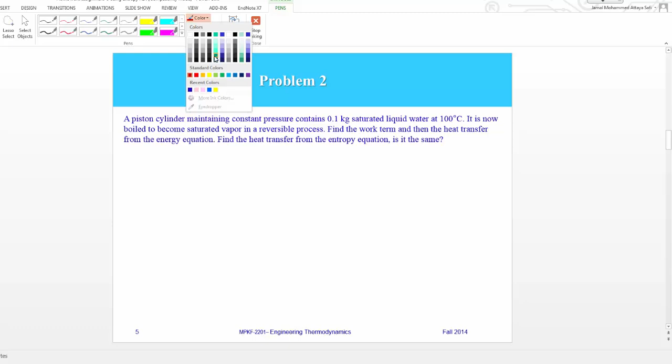Okay. Problem number two. I can choose probably this color just to draw it. The problem is saying that we have a sort of piston cylinder arrangement like this. And it tells me that I have 100 gram saturated liquid. So I'll write saturated liquid, basically water,

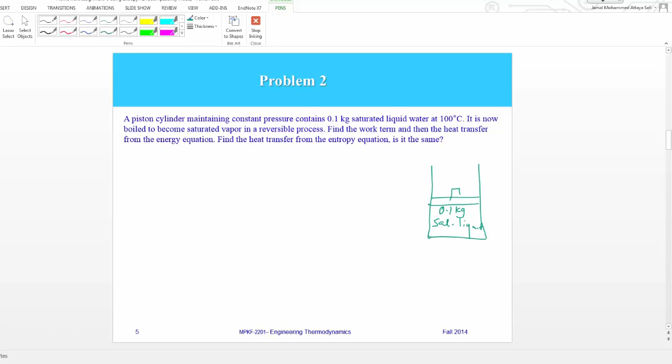at T1 is 100. So at 100 centigrade. And it is now boiled. So now we start heating. So let's say that heat is added here. You start actually heating the assembly, and until all the saturated vapor, sorry, until all the saturated liquid becomes saturated vapor.

In a reversible process, very important also in the reversible process because it also gives you a piece of information, and then it asks you to find the work and find the heat transfer from the energy equation, and also we ask you to find the heat transfer from the entropy equation, because now we can find Q using the entropy. That is the input from chapter 7, which is using the entropy analysis. You're going to see it's going to make it a little bit easier.

So before we draw, I will first define my system. I say this is my system, so the water inside is my system. And then of course we have some assumptions here, and the most important one is that we have a closed system here, so the mass is constant.

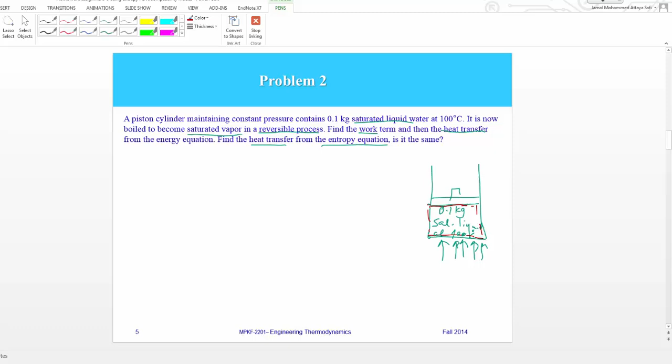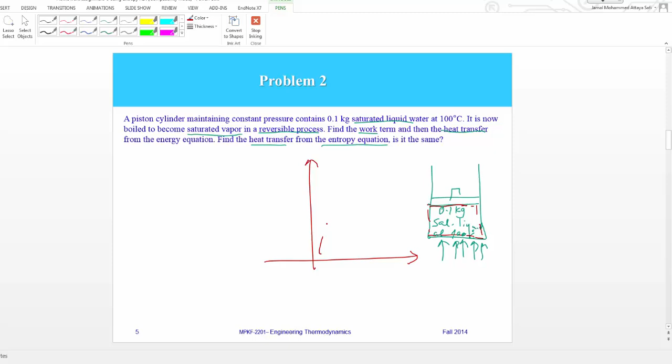Then we can draw the PV diagram or TV diagram in this case, because the temperature is given. The problem is saying that I have saturated water, which is at this line. So this is point 1. And it tells me I start boiling. This is also a very straightforward problem. I start boiling this until all the water becomes vapor. So this is a vapor.

And this happens if this is TV. So this is happening at 100 centigrade. And remember that the constant pressure lines are always like this. And you can see that it's a constant pressure process. We start at the start of the saturation dome, and end at the saturated vapor line. The problem is asking that we first use the energy equation, the one that we use in chapter 4, closed system, to calculate Q, which is the heat addition, and also it asks us to use entropy this time to calculate Q and compare between them to see if they are the same, basically.

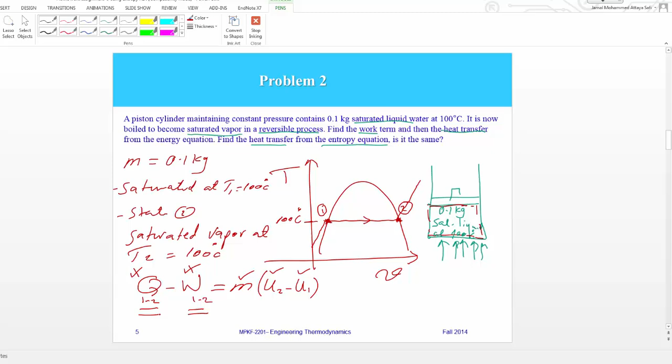U1 and U2 we actually can read or find, because state 1 is fully defined and state 2 is fully defined. So the challenge now is that either you need to calculate the work so you can calculate Q, or you can calculate Q so you can calculate the work. So let's try to calculate the work.

So what is the work? We know that for a closed system, it's an expansion work, a boundary work, and the boundary work from 1 to 2 is the integral of PdV from 1 to 2. Since the pressure is constant here, it's P times (V2 minus V1). I will just draw it here: this is a T-V diagram, and if this is 100 centigrade, this is V1, and this is V2. Very straightforward.

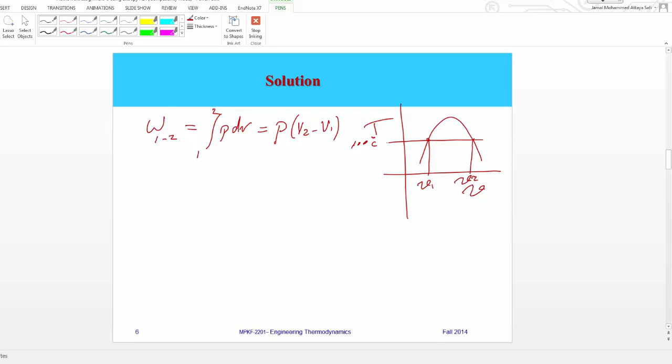So I can see that V1 is actually Vf at T1 of 100. I just go to the table at 100 centigrade and read Vf there, because as you can see, that is Vf and that is Vg. And V2 is actually Vg, gas, at 100 centigrade. I can also write here immediately, because we're going to need it, U1 is Uf at 100 and U2 is Ug at 100 centigrade. This is state 1 and this is state 2.

So if you substitute, you can immediately see that this is pressure multiplied by Vfg. And you know what this means? It means Vg minus Vf. And if you write this down, of course, please don't forget the mass. I sometimes forget the mass. You need to multiply by the mass to get the total work, the capital letter W. And the pressure in kilopascal, where did I get this number from? This is P, a constant. It's the saturation pressure at 100 centigrade. You can also read it in the table at 100 centigrade.

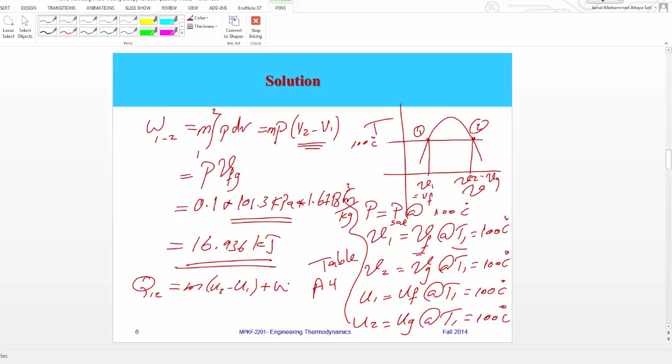Now, if you have the work, it wouldn't be difficult to calculate Q, because Q1 to 2 is actually m times (U2 minus U1) plus the work from 1 to 2, right? And the work we already calculated, and this we have, and this we have, so we can calculate Q. So Q1 to 2 is equal to m Ufg. I write it as Ufg because U2 is Ug and U1 is Uf. You can also read it immediately in some tables. Plus the work from 1 to 2.

And substitute the things that we know to calculate Q. Then Q1 to 2 is equal to 0.1, which is the mass, multiplied by Ufg, plus the work which we calculated, and that's going to give you 225.7 kilojoule, and that is the heat transfer.

Now you can also see how many ways you can calculate Q. I can also say Q1 to 2 is the mass multiplied by the difference in enthalpy, so mass times hfg. That's also another way of calculating. You have also learned it before, and that's going to give you 0.1 multiplied by 2257.03, and that's going to give you 225.7, exactly the same number as here. It's very interesting. It's very clear now. You see how we can calculate Q.

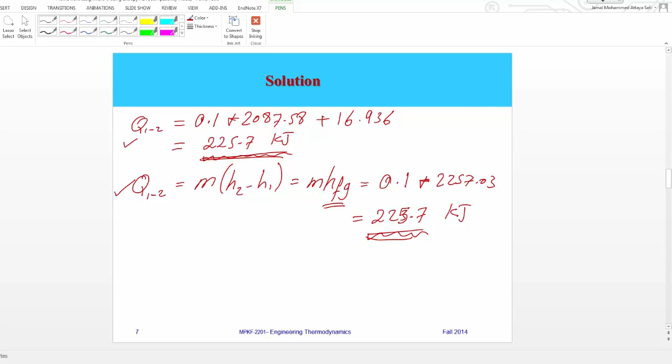So Q, either we calculate it by first calculating the work and then adding the work to the mass multiplied by the difference in internal energy. This is the second method that you can calculate Q, and that is Q equal to the mass multiplied by the difference in enthalpy. And you can see that it gives you the same number. And the third is using the entropy equation, as we can see. And I can write it here. I can see the entropy equation.

And you know it. We said that m(S2 minus S1), this is from chapter 7, is equal to the integration of dq divided by T plus the S generation, or the entropy generation. Now remember that this is the general form of the entropy equation, which is the mass multiplied by the change in entropy. The mass multiplied by the change in entropy is equal to the integration of dq divided by the temperature plus the generation, or the entropy that has been generated by doing this process.

Now, be very careful, if I have a reversible process, and that's very important because in the problem it said that it was a reversible process. If you have a reversible process, we said that the equality sign prevails and there's no generation, so that will be 0. If you have a reversible process, there's no generation, increase or decrease of the entropy, and that gives you this as 0, which means that

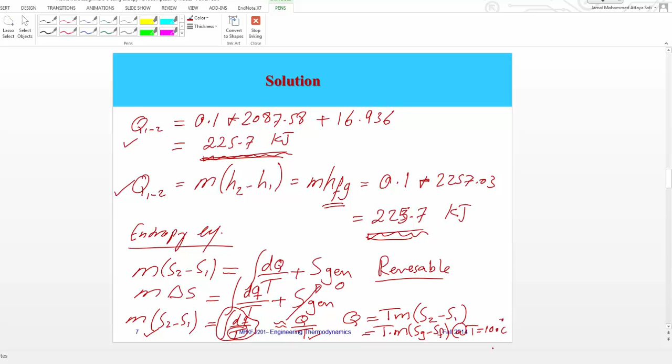You get this from the tables, and then I can write down here the final answer, I'll do it in different colors. So this is where we have the final answer, and if you put in the numbers, if you get this one and this one from the tables, and this is 100, you will find that Q1 to 2 is equal to, I need just to find the numbers, and that's 0.1 multiplied by 373.15 multiplied by 6.048. This is Sfg, you read it from the table. Please notice that this has to be in Kelvin. Very important, the temperature here has to be in Kelvin, so you have to convert it to Kelvin.

We have 100 temperature plus 273, and that's going to give you 373.15. And if you do so, that's going to give you 225.68 kilojoule. And as you can see, it's actually this number and this number. It's not a big difference, a very small error in the two numbers. So you can actually use any one.

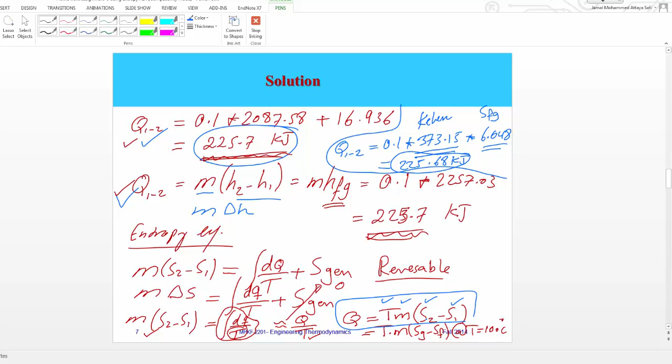Either you do this, so you calculate the work first, and then you add it to the mass multiplied by the difference in internal energy, or you can use this. This is the second way to calculate Q, which is actually the mass multiplied by dh, or you can use the entropy, and that's, as you can see here, this is the equation. So the three ways here are valid to calculate the heat added, or the heat needed.

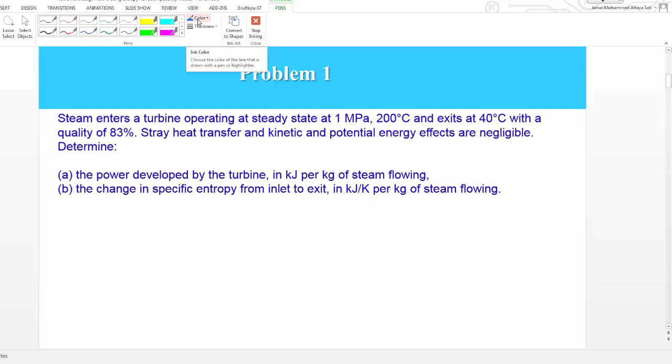Okay, we start with homework assignment 6 using entropy. That is problem number 1. Now, problem number 1 is saying that we have a turbine, so let's draw our turbine.

And that turbine, of course, the function of a turbine is to give me power out, or to give me rotation, which we call mechanical work, and that can be converted into electrical work. And to do so, we have, of course, the steam coming in at the inlet, so I will call this 1, and exiting at the outlet, and I will call it number 2.

And when the steam comes in, it comes with high enthalpy, and then inside the turbine, we suck some of this enthalpy or this energy and convert it to work, and the rest, of course, goes with the working fluid out at the exit. Now it's a steam turbine, and it is quite an easy problem in terms of that both inlet and outlet states are actually defined.

So I can write here P1 is 1 megapascal, so that is given, and T1 is 200 centigrade. And we know now, I hope, that when you have two independent variables or properties, the state is fully defined, and it exits at 40, so T2 is 40 degrees, with the quality, which is X2 now, is 83. Again, it's also two independent properties here, the temperature and quality, and that will definitely define fully the state.

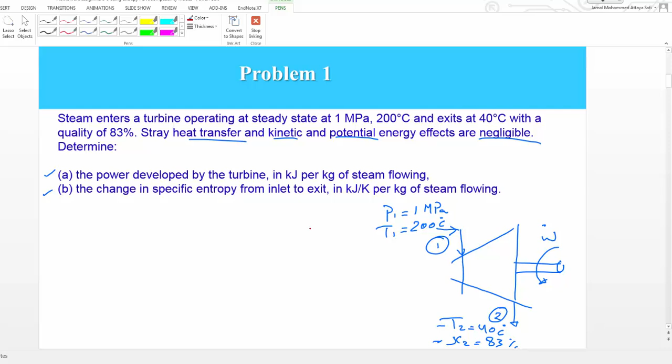Now we know that for an open system, and we know for turbine now, I hope, because then I don't need to write the whole thing, but we know it for turbine, especially when we neglect heat transfer, kinetic and potential energy, we know that the work, so let's first choose the system. So this is my system, this is my control volume. It's good always to do it just to understand. So this is my control volume.

And we can write first the work of the control volume, and if I do it in the rate manner, then it's actually the power, because the power is actually the rate that we are using the work or producing the work, divided by the mass flow rate, because as you can see here, I don't have any information about the mass flow rate. And he asked me here to find the power per kilogram of steam. So he's not very interested in calculating the mass flow rate here. And that is H1, enthalpy 1 minus H2. So as you can see, it's quite easy, because the challenge now is to find H1 and to find H2, and we know that state 1 is fully defined and state 2 is fully defined, so it's a very straightforward problem.

But you need to remember, sometimes some of the problems will ask you about the assumptions that you have made here, but let's say that the major assumption is that it's a steady flow. The control volume is at steady state flow. That's very interesting because it means that it's just one mass flow rate. It means that M1, mass flow rate at 1, equals mass flow rate at 2, equals M. And that means that I don't have any accumulation of mass inside the control volume.

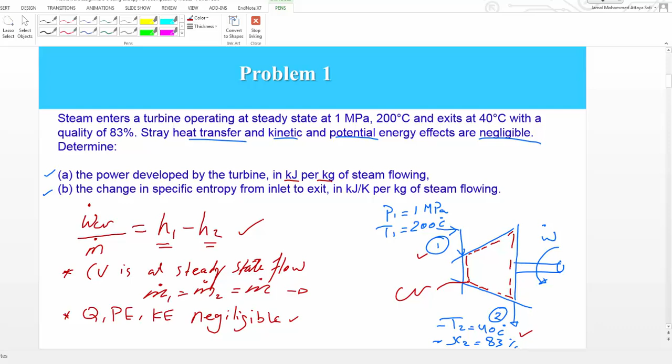Now we have another sort of assumption, and that is Q, potential energy, kinetic energy are negligible. You don't need to take them into account. And by having these two assumptions, you can see that the first law of thermodynamics becomes very easy. The form is actually the difference in the enthalpies. So the challenge now is to find those enthalpies.

And I'm not going, of course, to show you the table here. I've done it many times before, so I will just explain how we can get it, and I will write just the name of the table, and you can check it out. So let's write again the work. The work of control volume divided by the mass flow rate is equal to h1 minus h2, and then the challenge is to find h1, h2. Now remember, we said at state 1, we have the pressure P1 is 1 megapascal, and then we have the temperature T1 is 200 centigrade, as you can see here.

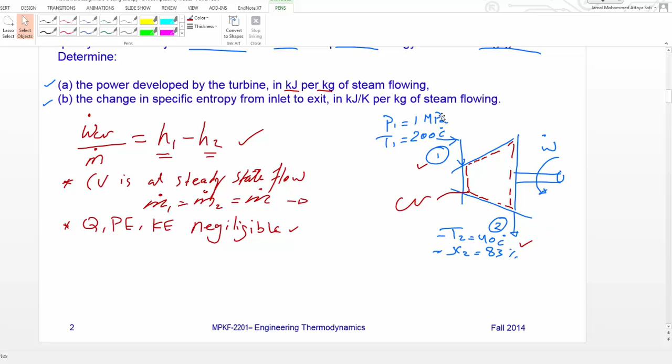And you can tell that it's superheated, because usually when I send gas into a steam turbine, it's superheated. If you don't know this, go to the pressure of 1 megapascal, and you will find that the saturation temperature there is less than 200. So if T1 is larger than T saturated at pressure 1, then we know that it's superheated. So it's just a matter of going to a superheated table.

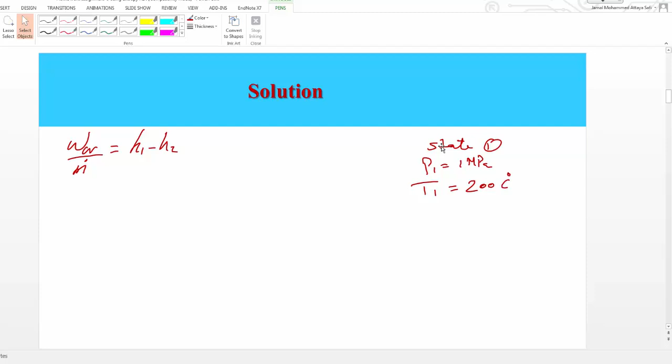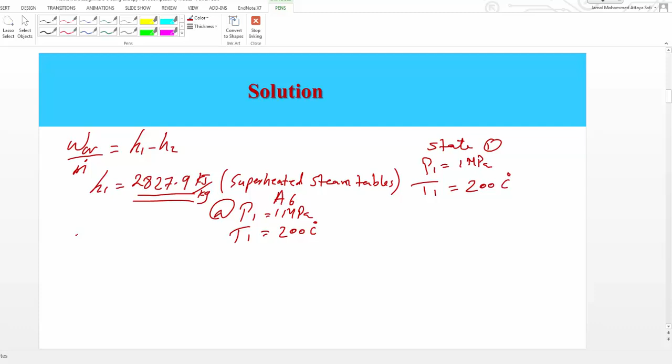So H1 is actually 2827.9, and that is taken from the superheated steam tables. It's A6 in your book at P1 equal 1 megapascal and T1 is 200 centigrade. If you do so, you can read H1 as 2827.9, and I can write it in kilojoule per kilogram. Okay, that's H1. Now H2, what do we know about state 2?

I can write it also here. State 2, we know that T2 is 40 centigrade, and we know that X2 is 83. I can just check it to be sure. Yes, it's 83 percent, or 0.83. Oh, that's nice. And then, of course, how can we find H2? If you go to the table, since X is given here, it means that we are under the dome.

I'm going to draw it at the end. Sometimes I like to draw it at the start, but for this problem, because it's quite straightforward, I will draw it at the end, and you can see the two states. So for H2, we know that it's the saturated table, and since the temperature is given here, we need to use the saturated table, temperature base, which is A4.

If you do so, you'll find that H2 is, of course, HF plus X2 HFG. HF and HFG can be read at T2 is 40 centigrade and X2 is 0.83. You can read those from the table straightforward, and that's going to give you H2 as, I will write just the final result here, 2165.1, and that is kilojoule per kilogram. So now I have H2. I can also write here the name of the table. It's the saturated table, temperature base, which is A4, so you can track it.

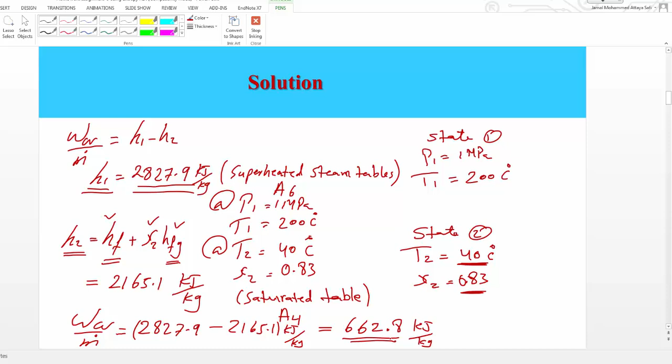Very straightforward. Okay, now he also asked to find a change in specific entropy. So if we say part B, find the change in specific entropy, sorry, which is ds, basically. Now again, both states are fully defined. So from the same table, I can also write S1, in kilojoule per kilogram Kelvin. Remember, that's the unit for entropy.

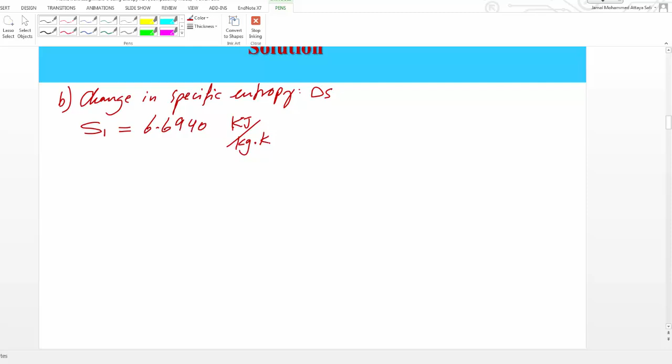And where did we find this number? Remember, P1 is 1 megapascal, and T1 is 200 centigrade, and we said that is superheated. We already used it to read H1, so you know where to go.

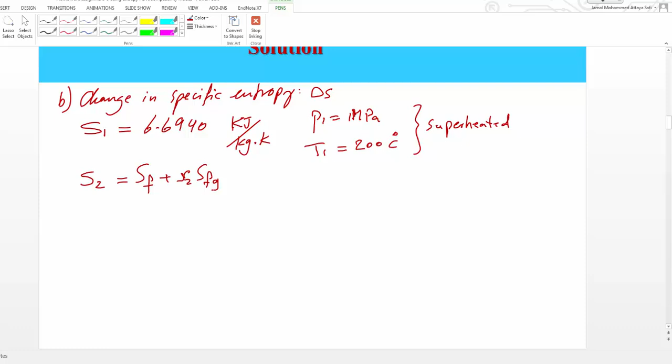And S2 is calculated the same way as H2, that is SF plus X2 SFG. You can read those from table A4 at T equal 40 centigrade, T2. And of course X2 is given as 83%. If you bring SF and SFG and put them here, you will get 6.9506, and that is kilojoule per kilogram per Kelvin.

So ds in this case is equal to S2 minus S1, and if you put this number and this number and subtract them, you will get that ds is 0.2566 kilojoule per kilogram Kelvin.

And you can see it's actually very little. That's because most of the time we assume that there is no change in entropy when steam is expanding in the turbine, assuming it's reversible and adiabatic, and this is why it's very, very small here. So it's quite a straightforward problem, as I said.